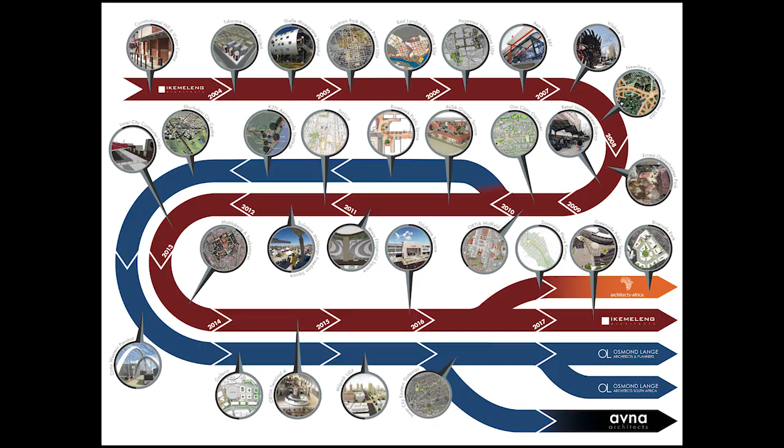This rather slightly narcissistic diagram that I've got on the wall right here charts the kind of professional journey that I've had in South Africa since 2004. That began with a very small company called Ikemeleng Architects back in 2004, and has ended up today with a group of 5 entities that employ 96 people across 5 offices, working across multiple sectors in multiple countries. So I've been very fortunate to have seen an interesting professional path during my time in South Africa.

What I want to suggest is that there's been no spatial meeting of the souls to follow on from the Truth and Reconciliation Commission. And that's a kind of theme of the projects that I want to show today. I've always been interested as much in the spaces between buildings as I've been in the buildings themselves.

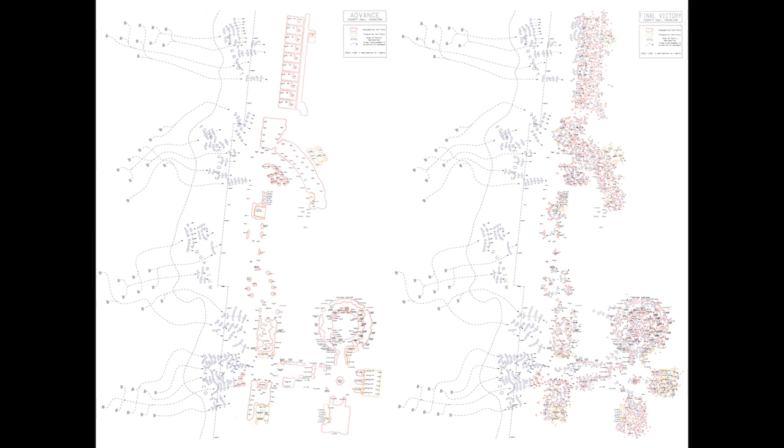This is a drawing that I did in my final year at the Bartlett almost 20 years ago that attempts to capture territorial patterns that admit or exclude, that encourage certain behaviors and discourage others, borrowing a graphic language from that of military maps, and beginning to map these spatial territories and speculate on interventions to break these down, to break them into smaller pockets, to granulate them, and to admit and include a greater number of people.

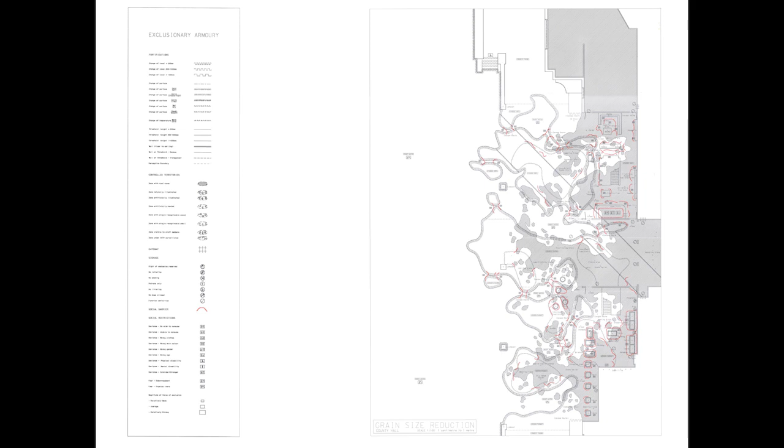So I looked at the idea of an exclusionary armory of sometimes quite subtle interventions and mechanisms, changes of level, changes of surface, roof cover, defensible spaces, social codes linked to consumption. So very subtle kind of changes that accept certain behaviors, accept certain people, and exclude others.

Now here at home in South Africa, our boundaries are far less subtle. The bubbles have become smaller compared to how they used to be in the days of the Group Areas Act, but they're still in place. We've also, it seems, become consumed by fear of violent crime. You hardly see a house without a high wall, particularly in the wealthier suburbs. And security features become a selling point for properties.

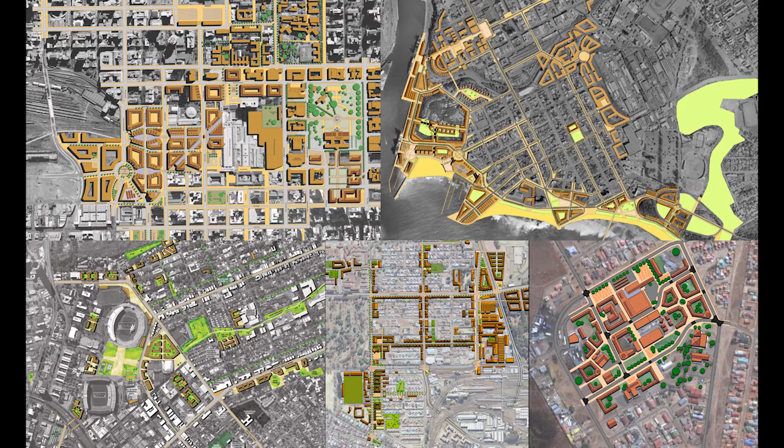Some of the early projects that we engaged in when Ikemeleng was formed in the mid-2000s were a number of urban design frameworks around the country, collaborating with a number of key urban design firms such as 2610 South and Urban Works and others. The focus was very strongly on public infrastructure and also on reimagining the role of the public environment as a kind of nation-building mechanism.

As part of this work with the urban design frameworks, we engaged with various stakeholder groupings, communities, property owners, business people, politicians, transport operators. This became an important initiation into South African society, its virtues and its ills.

Now, one of the first UDFs that we worked on with 2610 South was three UDFs in one, in fact, for Newclare, Coronationville and Brixton in the west of Johannesburg. This picture shows the house on Hamilton Street where my father and his siblings grew up. So there was a personal connection with the Newclare area.

Now this is also the area that at the moment has been the site of recent unrest and service delivery protests, sparked by a killing of a young mother caught in the crossfire of gangster warfare. What was quite interesting is that the issues that were coming up in the media, principally around inadequate housing, joblessness, nothing being done about the gangsterism, the corruption of the police, were exactly the same issues that were raised when we worked on this UDF 10 years ago.

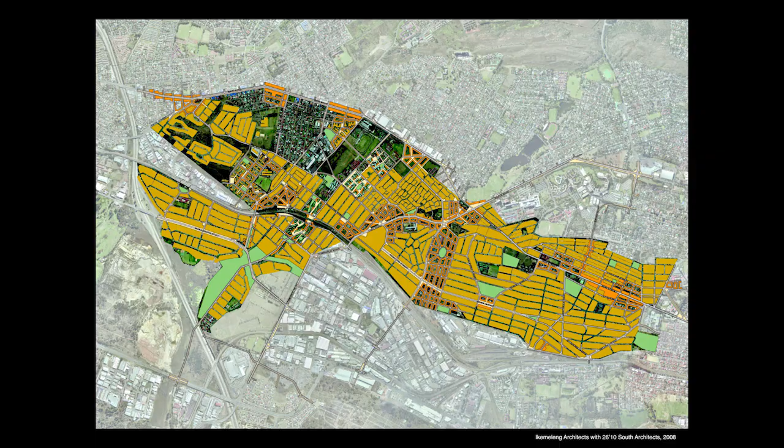So what was yielded was a UDF for a very large area of Western Johannesburg. New linkages between formerly segregated suburbs, because you've got a collection of different group areas from the apartheid era. New linkages across the railway line that is a big divider between the north and south, and a network of social infrastructure.

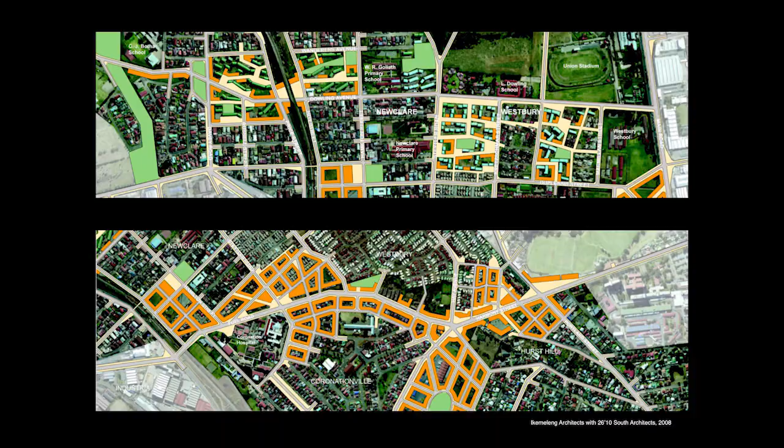But in particular, we looked at residential densification along key public transport corridors, and also the idea of a new spine along one of the key north-south streets in the area, through Westbury and Newclare, Dowling Avenue, that links the old council housing that is so neglected and where the drugs are sold, where it's a kind of epicenter of the gangsterism.

Lots of the elements were implemented, but I think also because it was a municipal project, the components that were allocated to provincial and national spheres of government were never followed through on, and I think that's what you're seeing with the unrest that has broken out lately. It's principally around provincial and national mandates like housing, healthcare, policing in particular, that are lacking, that were never followed through.

There's an interesting quote here from Steve Biko's book, I Write What I Like. "I no more work in order to live, I live in order to work. He has to wake up at 4 o'clock, 4:30 in order to walk a long distance to be in time for a bus to town. He works there for a while. So many calls are thrown his way by his boss. At the end of the day, he has to travel the same route, arrive home 8:30, 9 o'clock, too tired to do anything but sleep in order to be on time for work again the next day."

So that was Steve Biko recounting the daily routine of a black worker that he'd spoken to back in the 1970s. Now, what is really, I think, quite disturbing is that that's a reality for very many South African commuters, even today, some 45 years later.

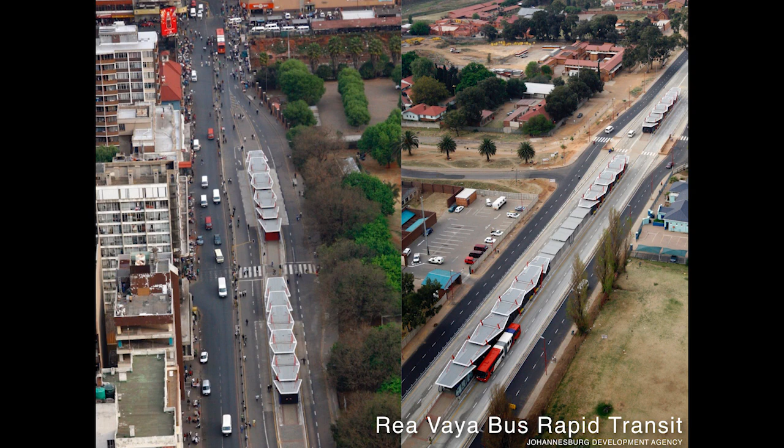So one of the projects that kind of came to define Ikemeleng Architects in its early years was our work on the Rea Vaya bus rapid transit. It's a blend of bus, tram and train, with median busways located away from curbside congestion and movement conflict, with raised platforms that facilitate rapid boarding and alighting.

So the BRT project is kind of an acknowledgement of the difficulty of absorbing the poorer South Africans within the inner core of the city. So it's a key socio-spatial transformation intervention whereby key nodes along transport corridors are densified on the back of a modal shift towards public transport and non-motorised transport.

In the words of the Deputy Minister of Public Works, public transport is not just about moving people, it is about democratising space, it is about deracialising the spatial geography that is still so deeply entrenched in the South African reality.

So the first stations, the prototype stations, were built next to Joubert Park in 2009. We worked on 5 different designs for the BRT stations, but it became very quickly apparent that, first of all, the city wanted one design throughout the whole network, and also that they wanted a very distinctive architectural language for the stations that would imprint a singular urban iconography across all of Johannesburg, common to Meadowlands and Morningside, to Diepkloof and Dunkeld. So it would kind of become Joburg's equivalent of London's Tube.

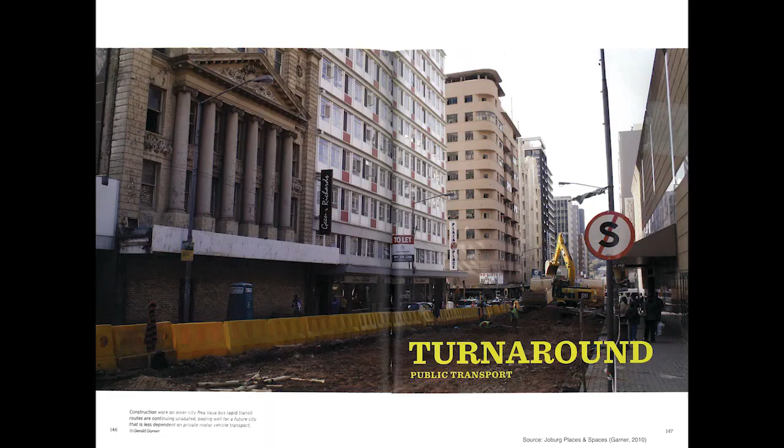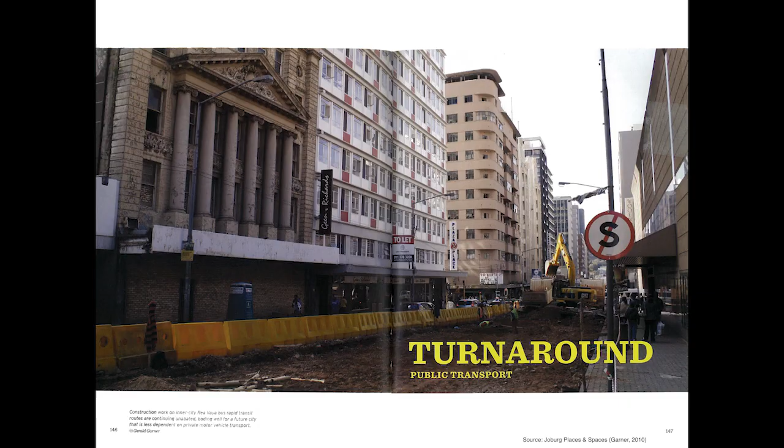But at a local level, it's actually quite destructive. It creates barriers to be able to cross the street. It's got very good intentions at a metropolitan scale, but at a local level, particularly in the inner city, it's got some quite adverse consequences. It needs a lot of elbow room.

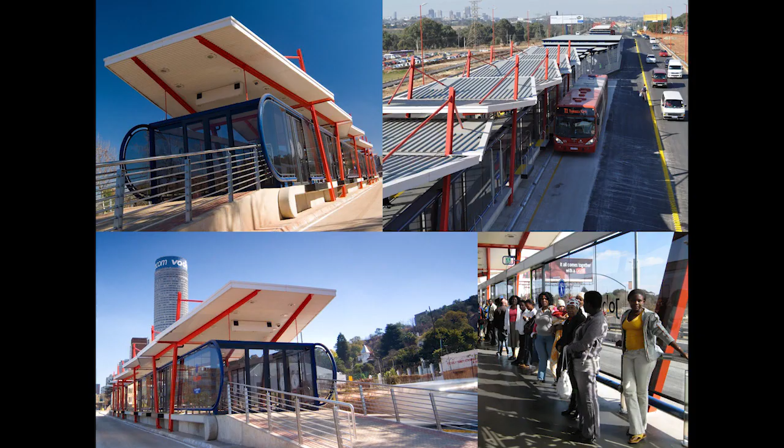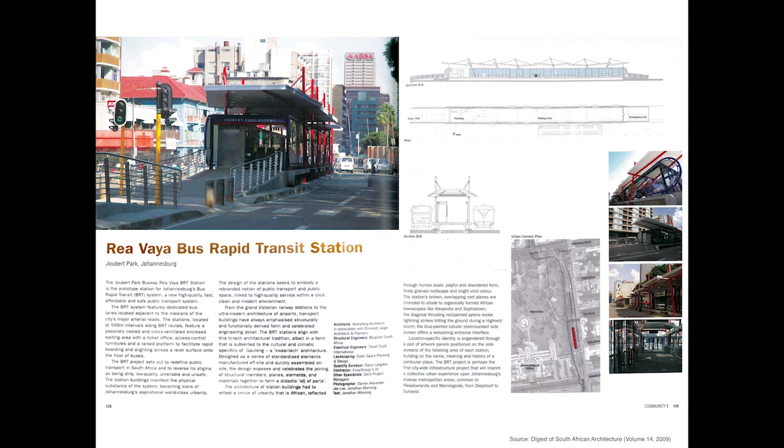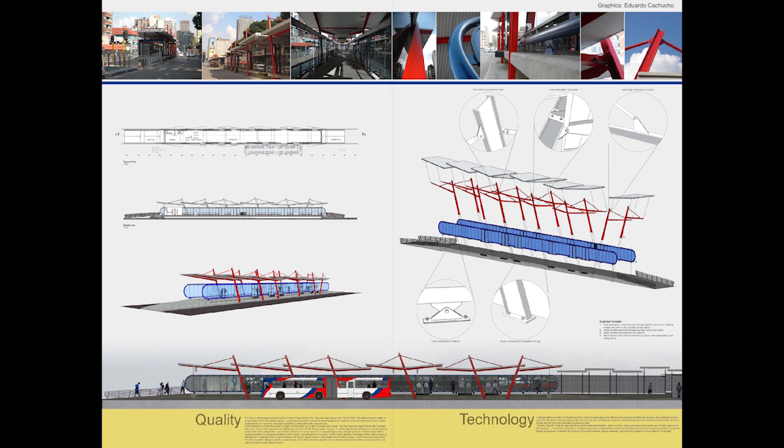Now there's a long tradition globally of transport buildings that celebrate technology, that express engineering details and the joining of structural members. So we designed the stations as a series of standardized elements that were manufactured off-site and quickly assembled on-site.

Each of the stations received a unique artwork treatment next to its ticketing module. It's a process that was run by the Trinity Session. Stephen Hobbs is in the audience today. He's still working on the current phase of the Rea Vaya. The aim was to try and engender a kind of location-specific identity that would be overlaid on the metropolitan identity.

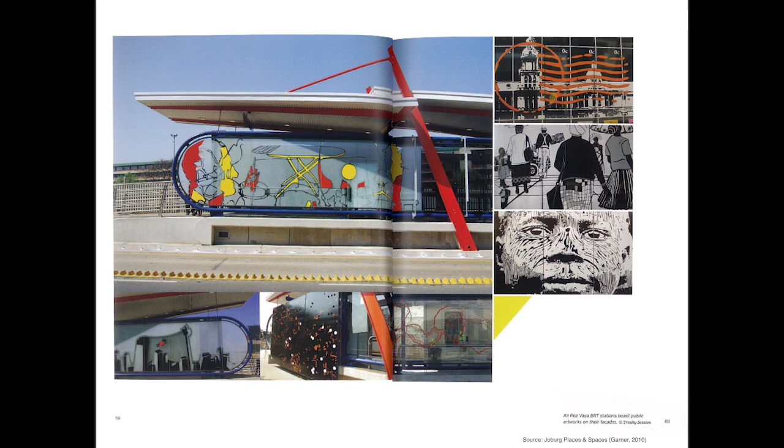And the artworks also represent a kind of shift in scale. So the stations are almost designed to be read at a vehicular scale from a distance, from the sidewalk opposite the stations. The artworks are far more immediate and work at a scale where they can be viewed through a bus window or from within the ticketing module.

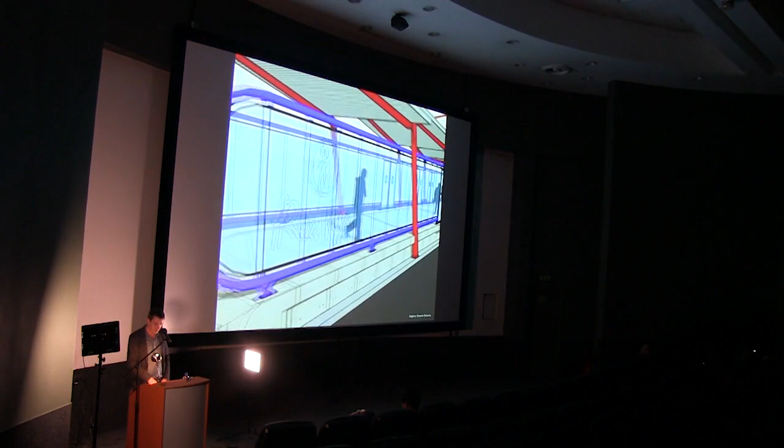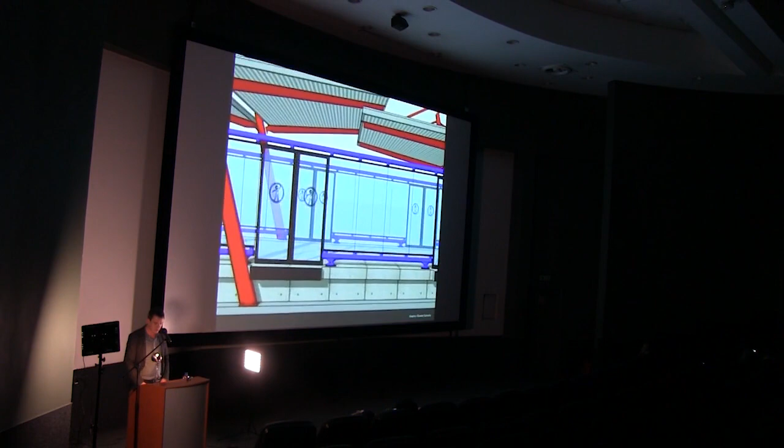So these are our ultimate clients for the BRT system. It's people that are used to queuing in dirty taxi ranks. So the Rea Vaya design was all about rebranding the notion of public transport towards an experience that's reliable, clean, safe, modern. We also attempted to design the screens in such a way that it would encourage cross-ventilation and passive cooling of the station, so it doesn't have any mechanical cooling.

Okay, so following on from our work on the physical infrastructure, we also got involved in some land use planning and urban design guidelines that we worked on with Mohammed Mayat Architects and Urban Designers back in 2009. So these were aimed at trying to set a template for densification of the BRT corridors and the station nodes, and also included ideas around public space reconfigurations to accommodate increased pedestrian footfall within these station nodes.

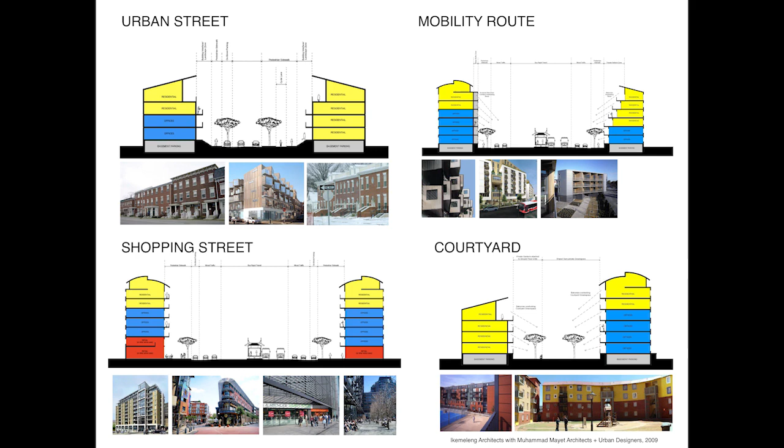We also looked at a series of typical street sections that would envisage wider street widths to allow for widened sidewalks to cater for increased pedestrian footfall, and kind of desirable building typologies to line these streets within the station nodes, and ideal scenarios around street edge interfaces.

So this work led us to be approached by the city around about 2012 to conduct a visioning exercise for 4 key nodes within the city of Johannesburg that were eventually integrated into the city's planning policies. Those 4 nodes were Sandton, Stretford, Orlando, and the inner city. So the first one, Sandton,

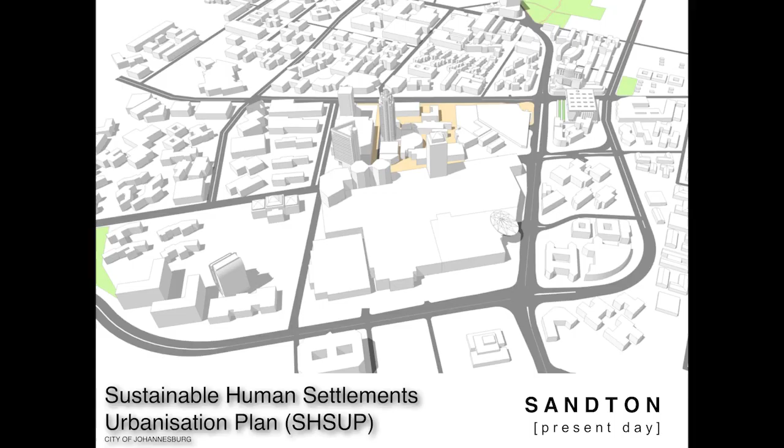the focus was on Sandton's function as a financial services hub, and also on how it might become more inclusive. Because if you know Sandton, there's this hard grid of streets, blank wall interfaces along lots of the major routes, a very difficult environment for pedestrians to traverse. So we looked at how it might transform on a kind of 10-year interval. So we're actually approaching 2020 now. Proliferation of upmarket residential developments that is

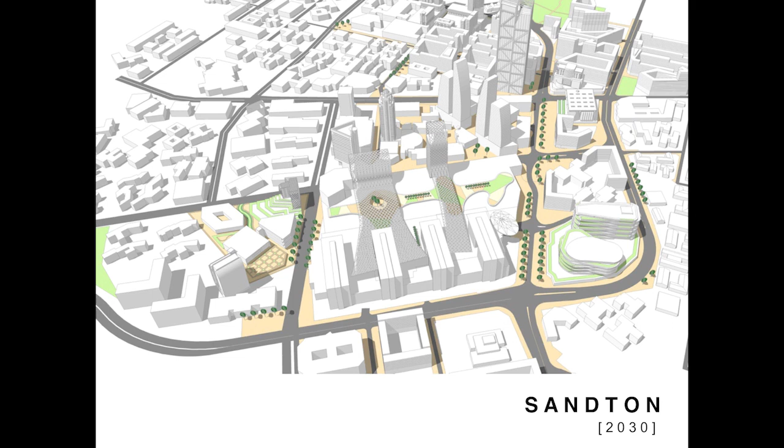happening right now. So we looked at the idea of repurposing Rivonia Road, narrowing Rivonia Road to make it more of a kind of pedestrian priority high street, and that the traffic would be pushed to the outer ring to make the core more pedestrian friendly. By 2030, a shift in travel patterns towards public transport and ride sharing was assumed, and some of those parking plinths of the big office buildings could potentially begin to be converted into cafes and shops and bars that open up onto the street.

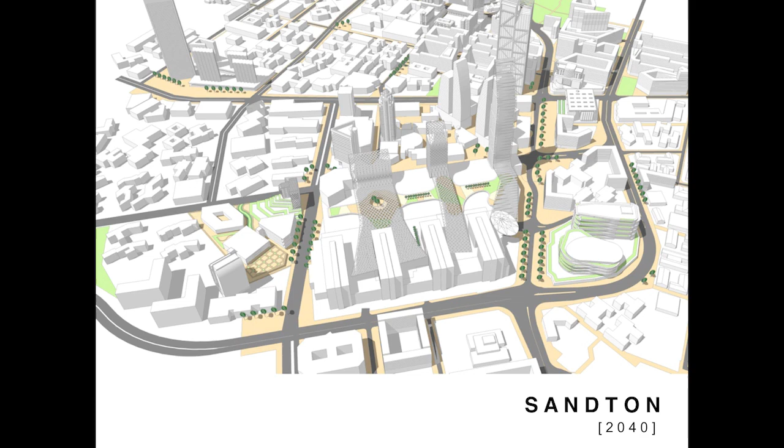By 2040, there'll be further densification, and you'd start to see the impact of inclusionary housing policies. So some of the housing developments would include gap housing, affordable housing, so that it becomes more of a mixed income residential area. An expansion of the walkable core into the neighbouring suburbs.

Now, some of this work led to a real project that Osmond Lange has just completed, the Sandton Loop, which is a NMT and pedestrian priority set of infrastructure along the soon-to-be-open BRT route loop around Sandton CBD.

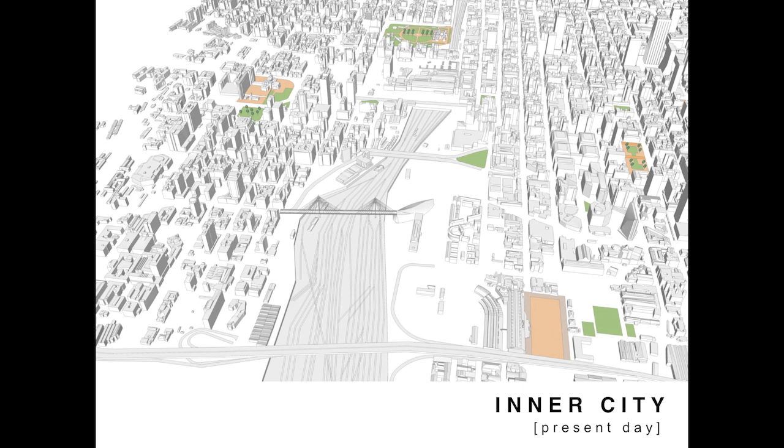With the inner city, the focus was on leveraging its status as a continental marketplace. So by 2020, the International Transit and Shopping Centre, the long-distance bus and taxi facility that you can see going up at Kazerne right now, would be in place, as well as several upgrades to key public spaces.

Then we looked further ahead. The idea of pedestrianising Noord and Sophie de Bruyn Street and Wolmarans Street, and that some of the railway sidings would be relocated to enable us to put a park beneath the Nelson Mandela Bridge that would become the focus of where the city can host concerts and outdoor events. So it would become a little bit like Johannesburg's equivalent of New York's Central Park.

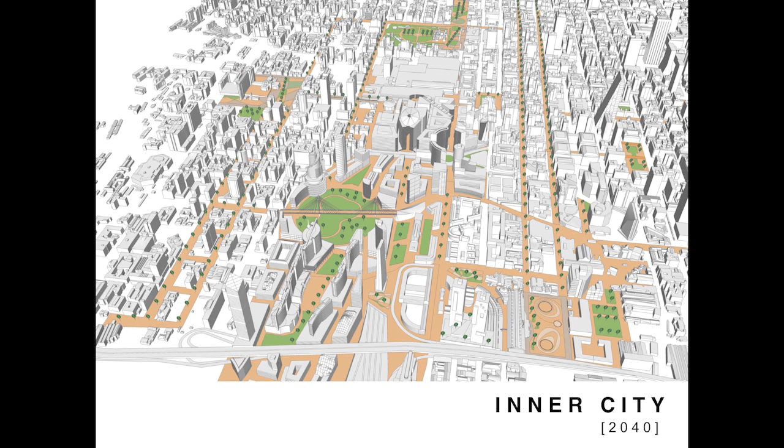By 2040, the idea of having 300,000 new residential units within the inner city, so a shift away from office buildings towards inner city residential, and distinctive quarters, each with their own character: Little Lagos, Chinatown, Somali Town, Little Kinshasa, and the Ethiopian Quarter, would be celebrated and expressed so that they become places not just for locals but for international tourists to come visit.

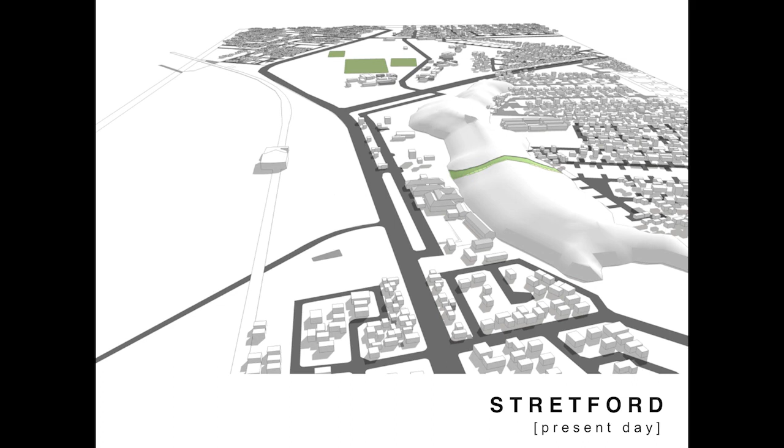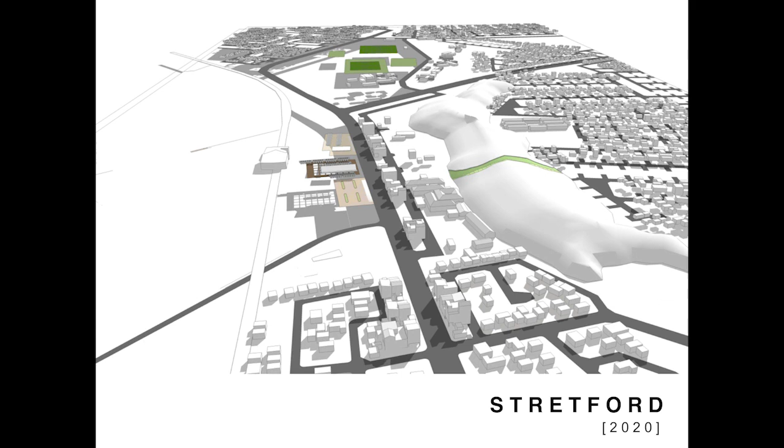Now, Stretford, on the southern edge of the city in Orange Farm, is 30-40 kilometres away from the CBD. The focus here was on creating an enabling framework for social mobility and providing support infrastructure for the non-economically active. So by 2020, we see the provision of new social infrastructure, libraries, clinics, sports facilities. By 2030, the expansion of the transit-oriented development around the PRASA station and the introduction of free Wi-Fi in public spaces. By 2040, it becomes a node for small businesses and for residential expansion and densification.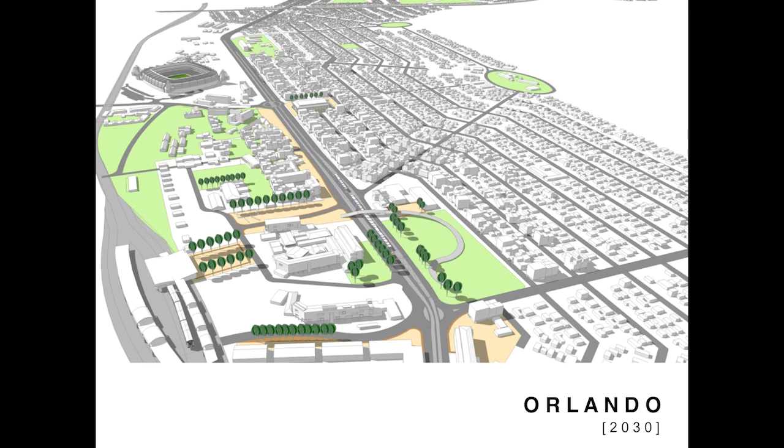So by 2030, a new Mashinini Park on the old sports field and a footbridge link across to a public square linking to the station. And the beginnings of incremental owner-led self-build densification. So a very different pattern from Sandton and the inner city, where it would mostly be developer-led. In the township, because you've got this fine-grained townscape, we looked at ideas of how densification would happen on an incremental basis, a stand-by-stand basis.

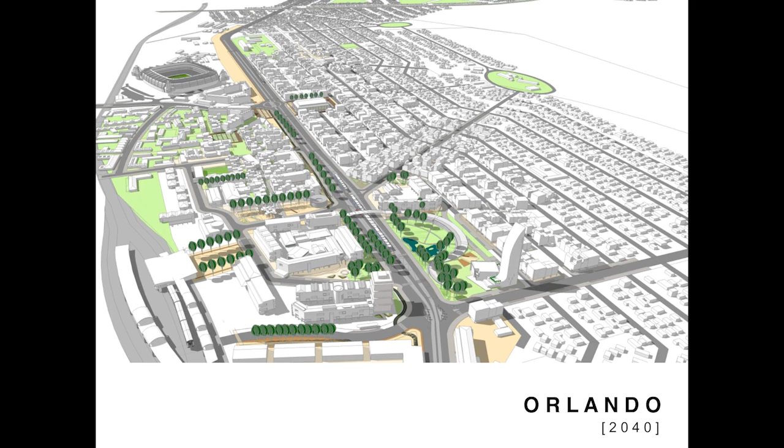Then lastly, 2040, further densification. It becomes a location for businesses seeking more affordable rents compared to the inner city and the northern suburbs, and a township vibe energized by density.

So following that project, we were approached by an international organization called the Institute for Transportation and Development Policy. It's a New York-based advocacy organization. We were one of 10 architects selected to represent their city and to look at the impact of transit-oriented development intervention on a 1 square kilometre section of our city.

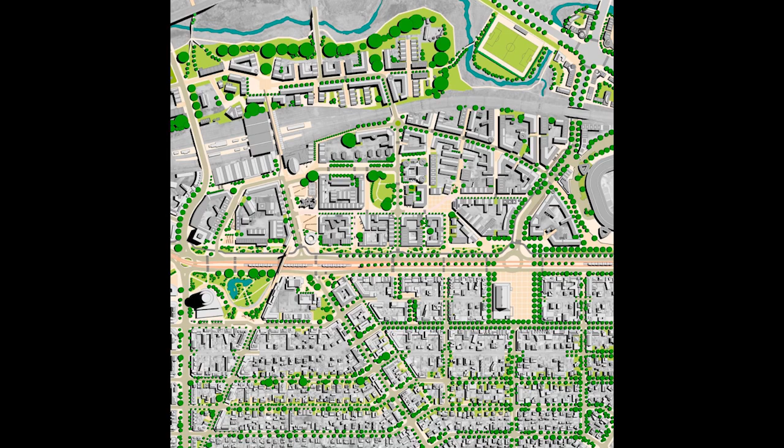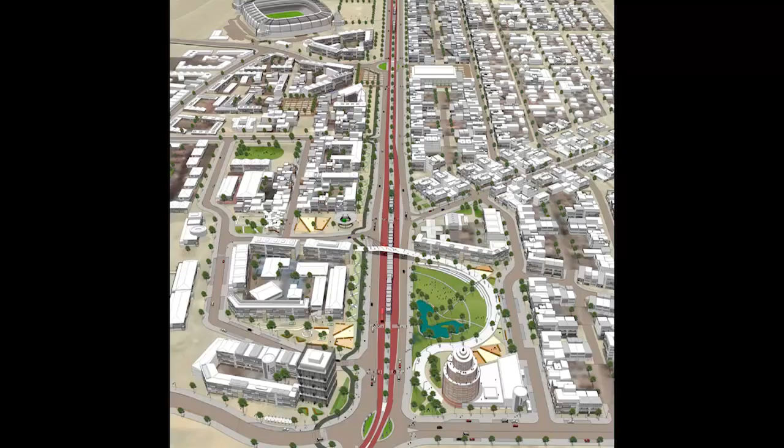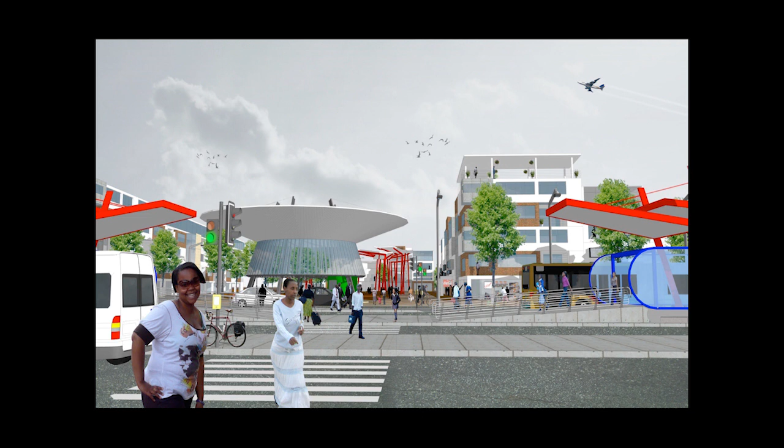So this was really a kind of further rendering, further development of the exercise we did for the City of Johannesburg's planning department. So this image is an image of a public space around the Rea Vaya station, including a ticketing hub, the idea of integrated ticketing between Rea Vaya, Gautrain and Prasa. The activation of Mooki Street so that it becomes a kind of South African version of the Champs-Élysées, lined by buildings with ground floor retail, but our own South African version with spaces and facilities for traders.

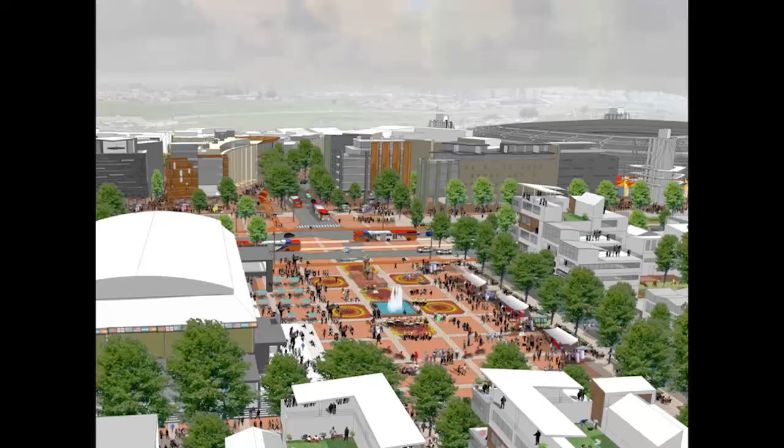And a major public square where the current car park is for the big community hall. Turn that into a major public space that anchors the precinct, a community space for gatherings and events and after-match festivities for Pirates fans when Pirates play at the nearby Orlando Stadium.

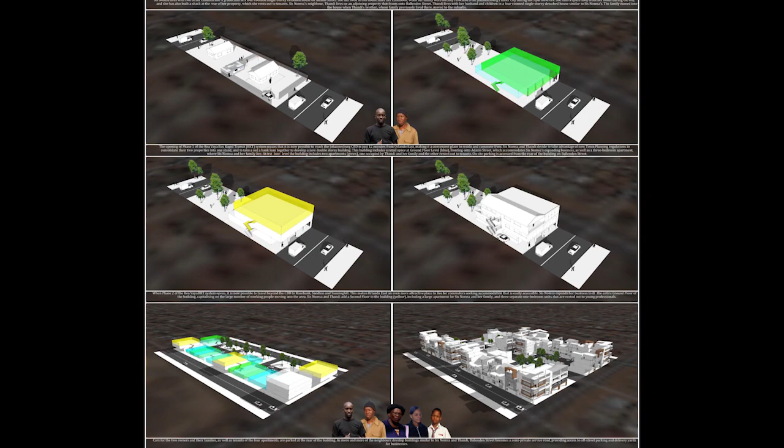Then we also looked at this narrative that was created around incremental self-built densification, geared towards income generation from creating space that could be rented out and create an income for the property owner, and job creation so that it would encourage mixed use, ground floor businesses and residential apartments above, transforming from this kind of standalone township house towards a multi-level mixed-use building typology.

Now, flowing from our work on the BRT, we also worked on a number of public space projects along the Phase 1 BRT route, which I'm going to show you, not all of these, but a couple of the key spaces. Now, the first of which was work within Johannesburg's shopping district, the retail improvement district. Despite inner city decay, it still functions as the city's major retail hub. It's kind of Soweto's CBD, but it's home to some of the biggest stores of chains like Edgars and Truworths, and even Woolworths has got one of the largest stores in the country.

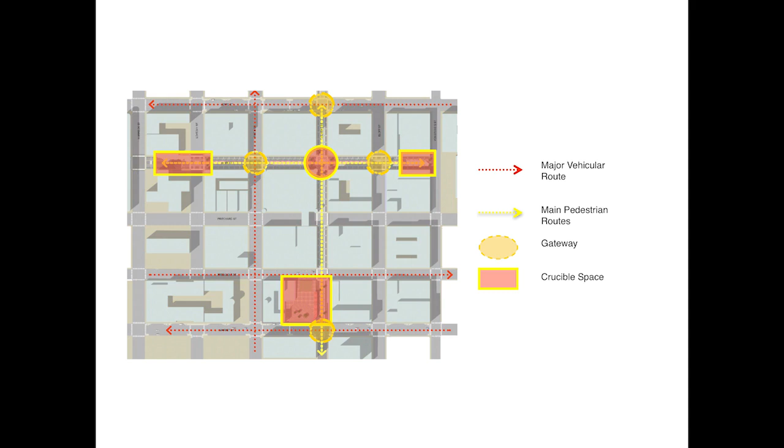So our plan for the retail improvement district revolved around creating pedestrian priority routes along Kerk Street, linking Bank City to the High Court, and along Joubert Street, which links Park Station Concourse in the north, all the way down to Gandhi Square in the south, and that these would be the primary pedestrian distributors within the RID and the primary shopping streets. Then also this idea of crucible spaces, nodes within the precinct and along those routes that would act almost like the event spaces that you get in shopping malls, but on an urban scale.

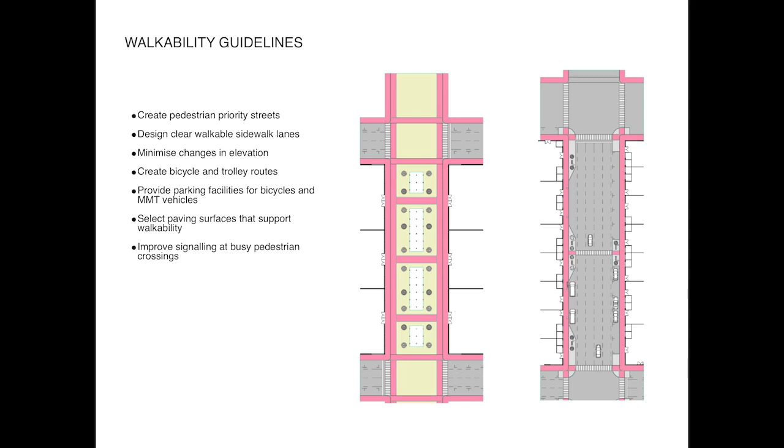We looked at some walkability guidelines. We designed streets for walking rather than just for driving and parking. Looked at how you might remove obstacles, widen the sidewalks, create a little bit more generosity, especially on the street corners, minimize elevational changes.

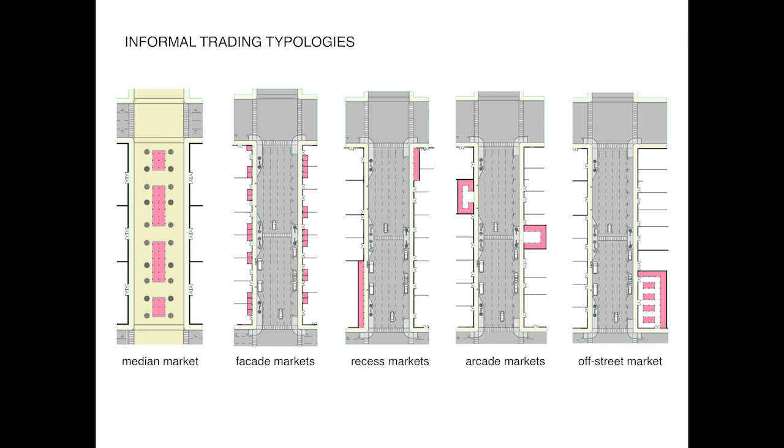And then we also looked at how you might incorporate informal trading within the retail improvement district. It was happening informally. A lot of the shopkeepers, the shop owners were complaining about their doors being blocked by informal traders. So we looked at a way that the two could coexist and that they might actually cross-fertilize each other and complement each other even, because a unique offering of Johannesburg is that you can go and shop in a major retail chain but also buy from an informal trader.

It's one of the few places you can do that. So Kerk Street Market was one of the first markets that we developed based on those typologies that I showed in the previous slide. A median market, so it's kind of like the BRT of informal trading. It sits up the middle of the street, pulls the traders away from the face of the buildings and obstructing their entrances, so that you essentially got two parallel streets.

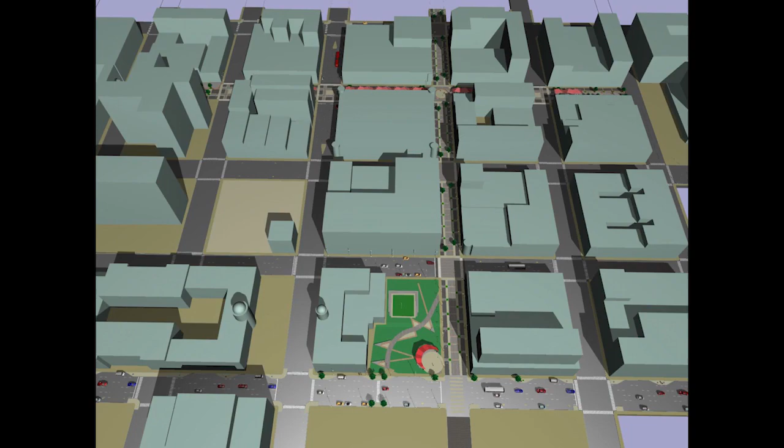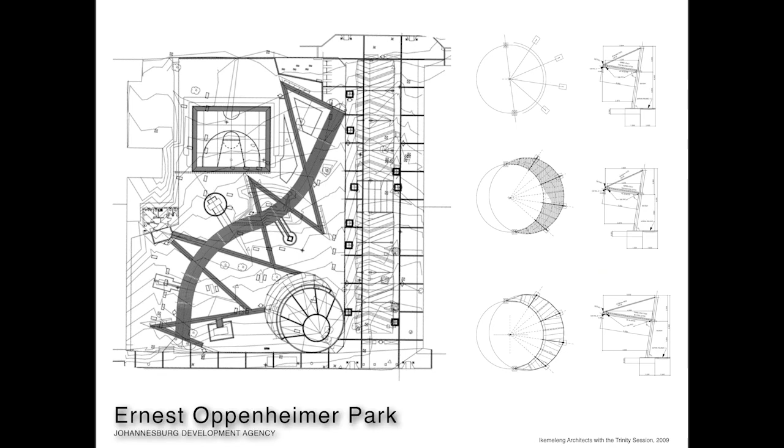It used to be home to the Leaping Impala sculpture that was eventually relocated to the Anglo precinct because it kept getting vandalized. So we looked at the idea of a sculpture garden that would sit at the southern entrance to the shopping district. You've got a diagonal pathway that divides the park into two distinct pockets, an active pocket and a passive pocket. A multi-purpose court in the northern pocket, geared for active games and sports, and a mini amphitheatre for events and performances in the southern pocket.

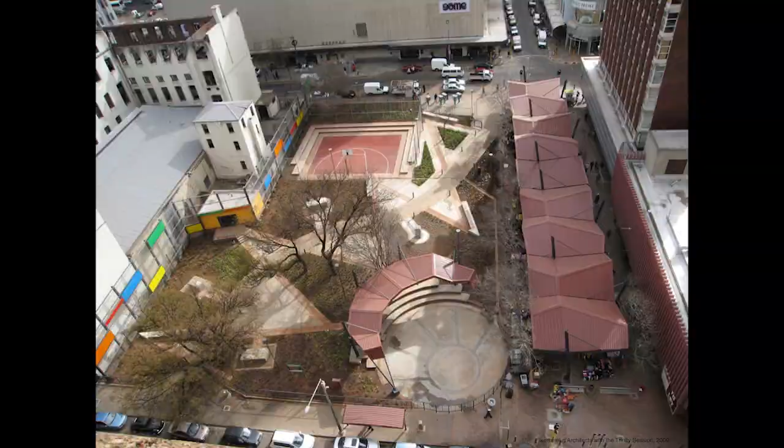So there's a second pathway that zigzags across the main pathway that links a series of sculptures and seats. The Public Artworks project, again overseen by the Trinity Session. A new Impala sculpture was put in place, giant replica of the Oppenheimer diamond, and seats adorned with text celebrating Joburg's place in popular culture. Basketball court was installed geared to the new younger resident profile of the inner city, a shift away from the older resident profile of the past. And then this amphitheatre with this kind of praying mantis roof canopy that got nicknamed in the office Crouching I-beam Hidden Channel.

Then on to Mary Fitzgerald Square. It's actually been upgraded twice. We were responsible for the second one. It was necessitated because the first time they did it, the electrical infrastructure wasn't sufficiently protected. So every time Standard Bank Joy of Jazz or a major event came to the square, the electrical infrastructure was getting damaged. So they had to lift all the paving and replace it, so it was seen as an opportunity to do something different. So we were the designers for the second time around.

So Mary Fitzgerald is one of the most important civic spaces in the city. It's one of the few places in Joburg where large numbers of people can gather to watch performances or outside broadcasts or to protest or march. It's the primary gathering place for most of the marches that happen in the inner city. It anchors the Newtown Cultural Precinct, but it also struggles with this dichotomy of its dual role as a place of gathering on the one hand and a place of day-to-day use on the other hand, animated when full, but bland and overscaled when empty.

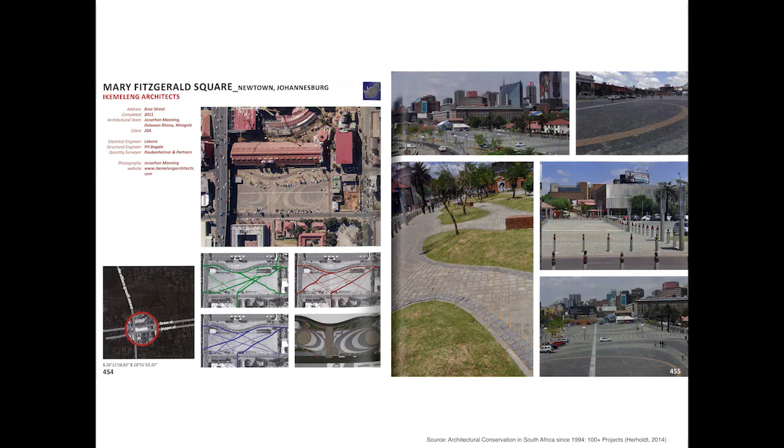So we attempted to overcome some of these shortcomings. We mapped movement patterns during its dormant period to look at how people were passing through the square or using the square, and we attempted to respond to these. So we came up with this idea of a large public space bisected by a central axis, so we kept that from the previous design, that is aligned with the front entrance to Museum Africa. And we introduced a paving pattern that mimics movement and crowd gathering patterns.

Now, usually we're kind of against this idea that you do funny things with the patterns in the paving because you don't read them except on the architect's drawing. Mary Fitzgerald Square, because of where it's sited next to the double-decker highway, it's one of the few public spaces where you can play with paving and it can actually be seen without using a drone.

So we introduced this idea of congested cores that gradually fragment into smaller, looser pockets around the edge of the square. Then around the edge, we introduced small amoeba-like pockets of softer landscaping that introduce a kind of gentle shoulder that envelop the square, shielding it from the fast-moving vehicle traffic and offering places to sit or lie on the grass, particularly when the square is not in use by a large gathering.

And what was interesting is the edge of the square started to become occupied. You started to see people coming out and having lunch or sitting and talking on the benches and so on, which was quite encouraging.

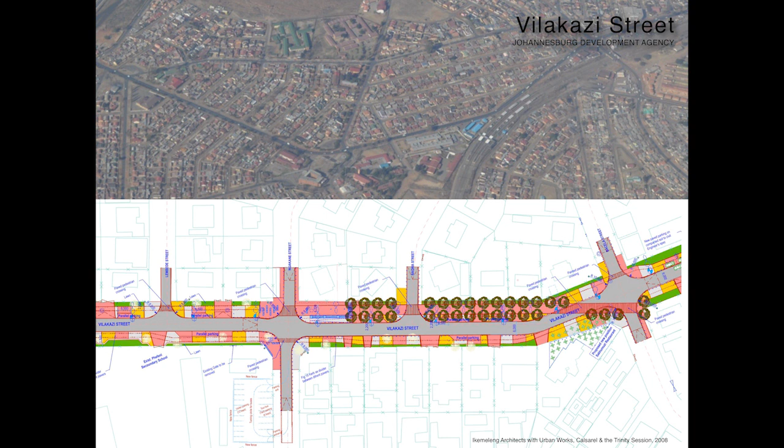So one of the important steps we took at the beginning of the project was to conduct a kind of literature review and interviews with some of the people that were around at the time to establish exactly what happened in the space and where they happened. So this is a kind of mapping of the confrontation between police and students who were marching from Morris Isaacson School down towards Orlando Police Station, down Vilakazi Street at the corner of Moyama and Vilakazi. And this is where we're told it all kicked off.

A dog was released into the crowd by the police. The dog was stoned to death, and that prompted the police to start shooting indiscriminately at kids, and they carried on shooting as the kids were running away. So the red is showing the patterns of where the school children were, and the blue, there's a housing development now, but it used to be an open site. That was where the police were gathered with their Casspirs.

Then further up Moyama Street, at the corner of Moyama and Vilakazi, a similar confrontation took place, with some of the students trying to get down an alternative route to get to Orlando police station. Again, they were stopped, and shooting started here as well.

And this is the sequence, the famous sequence that many of you will recognize with Sam Nzima's photograph when Hector Pieterson was shot. So we were able actually to identify the spot where Hector fell, and Mbuyisa Makhubo picked him up and ran along the street, along Sisulu Street, and where the famous photographs were taken, on the way to Phomolong Clinic, where he was examined and pronounced dead.

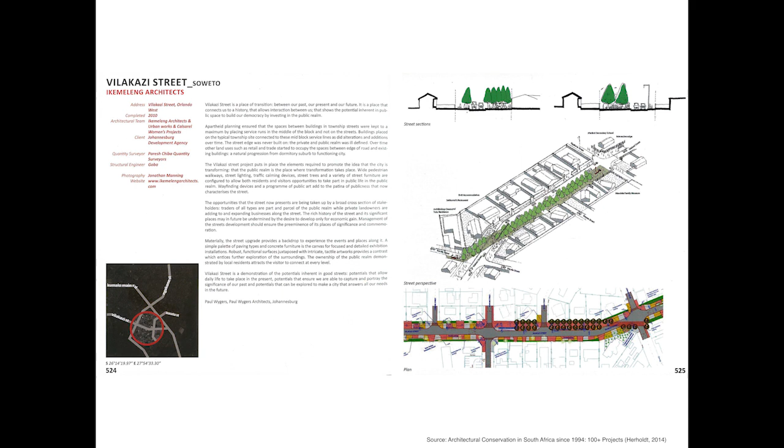Now, the first student that was actually killed prior to all these other confrontations was a young man called Hastings Ndlovu, further down Khumalo Street, at the border between Orlando West and Orlando East. So we were also able to piece together how this happened and where exactly Hastings was shot. It was on the bridge itself. So all of these clues, this research became a rationale for how we started to intervene within the precinct and to mark these spots and spaces where these events happened.

We approached, and I say we, it was a joint venture between Ikemeleng Architects, Urban Works, and Calsarel Women's Projects, a landscape architecture firm. We approached the upgrade of the Vilakazi Street precinct with a mix of trepidation and inspiration, having met people like Antoinette Sithole, who's Hector Pieterson's sister, and gained an understanding of exactly what happened in the 70s.

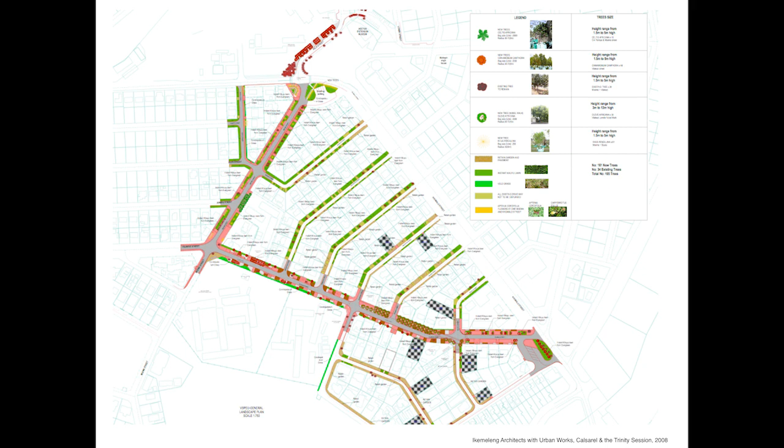We also looked at this idea, a lot of you will be familiar with, that when homeowners in many of the townships upgrade their driveways, they often extend that paving onto the sidewalk in front of the house. And so you get this patchwork of different paving materials, different paving treatments along the sidewalk that almost mimics the townscape grain of the buildings themselves. So we tried to do the same thing with our paving intervention. And there you see this kind of patchwork of different paving materials that are extended from the cadastral grid.

So some simple pragmatics: sidewalks to walk on, places to sit, places to trade, and a kind of an enabling framework for the street to come alive, which it has done ever since this upgrade went in. It's one of the biggest impacts we've seen of any of our public environment upgrade projects. And during the 2010 World Cup in particular, and on Youth Day every year, the street is abuzz with activity.

You really see lots and lots of people come, and we've seen a big transformation with lots of the houses along Vilakazi Street converting to businesses, one of which we're actually working on for a private client at the moment. There was also a very rich public artworks program, born of a series of community workshops, again coordinated by the Trinity Session, that added an extra layer of narrative to the already rich streetscape.

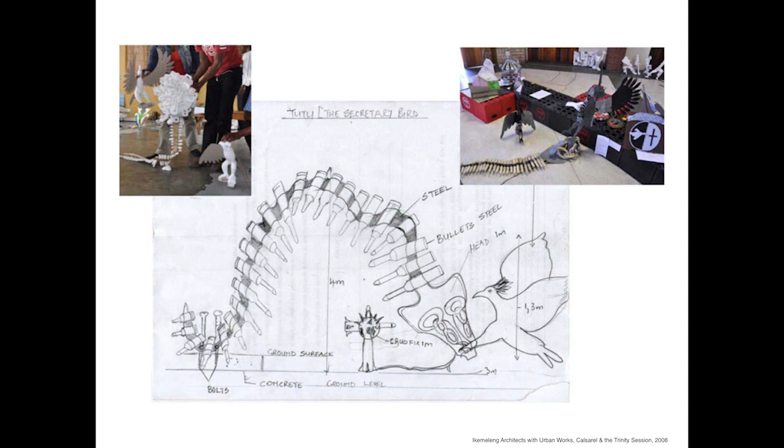Now, this is actually an artwork that wasn't implemented, which I'm very disappointed about, because it was my favorite one that emerged from the workshop process. This was going to be placed on the wall of the Tutu residence, and it was a sculpture that featured a secretary bird perched on a snake, the body of which was made of a machine gun magazine, and it was symbolic of this bird overcoming the evil of the apartheid snake, which unfortunately was never taken forward. But many of the others were.

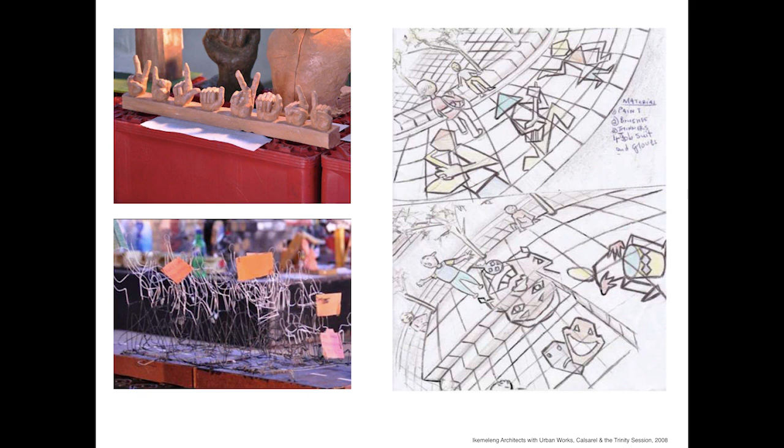The Vilakazi hands became a gateway sculpture at the southern end of Vilakazi Street. The wire models of the students protesting marked the point of the confrontation between the students and the police at corner Moyama and Vilakazi. And there you can see some of the translations.

And these artworks have become points of commemoration that happen every year on June the 16th, when people gather. You know, there's a kind of tradition, many people dress up in their old school uniforms on Youth Day and commemorate the sacrifices that were made by that generation of students. And a lot of them travel to Vilakazi Street to commemorate the role that these individuals played in the freedom struggle. And a lot of them use the artworks as points of commemoration.

Now, this artwork was a very interesting interpretation that sits outside Sakhumzi's restaurant at the lower end of the Nobel Laureate Walk. There's a Tswana proverb that says, "Two bulls can't stay in the same kraal." And so this was alluding to the fact that you've got these two Nobel laureates. But in actual fact, their points of departure in the freedom struggle were very different. Nelson Mandela, prior to his imprisonment, was one of the instigators of the armed struggle, versus Bishop Tutu's role as the kind of peacemaker.

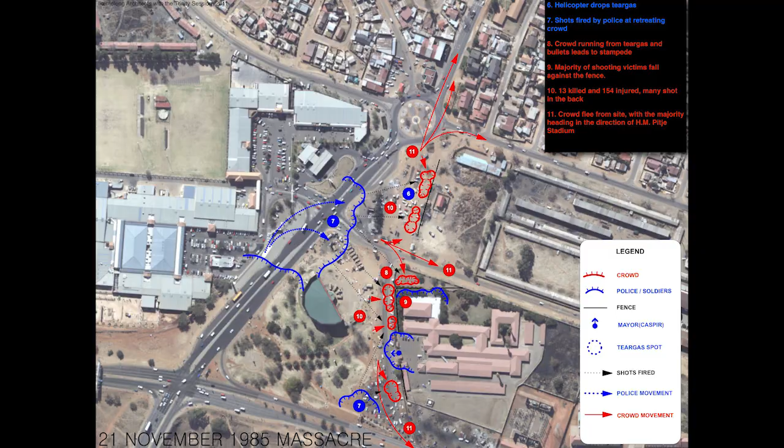So lots of people were shot in the back, and you'll see the line on the northern side. This line, I don't know if you can see that there. The straight black line was a fence line that used to exist, and lots of people were trapped. Lots of the dead were trapped against that fence with nowhere to escape to, and that's where lots of the people were killed. So the layout of the park was informed by these mappings that we created that looked at where exactly the key historical events had happened.

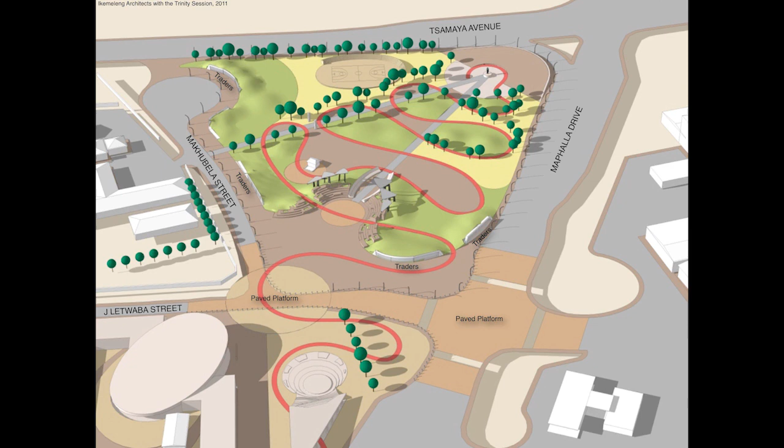There were two key axes that we kept intact that were already in the park. One linking the entrance to the municipal offices to the existing Solomon Mahlangu statue in the southwestern corner, and then a new axis linking the statue to the street corner of Letwaba and Makhubela Street, which is where the massacre happened. So one of the first small interventions we made: the statue used to look outwards towards the road intersection. So we decided this is not a good idea.

Let's reorientate the statue so he faces the park, faces the public space, faces the pedestrians. We also introduced this ribbon walkway that meanders through the park, linking various points of significance and artwork sites. And then we created this gathering space that straddles the street intersection so that when there's a big gathering, the streets are closed and it occupies the road, a little bit like when there's a funeral or a wedding in the township and they close the street to occupy the street. So the same kind of notion.

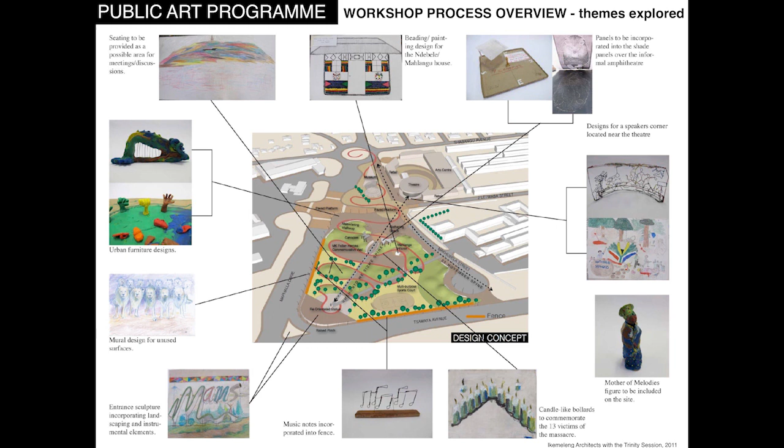Again, we worked with the Trinity Session on a community artwork project. This is some of the artworks that were produced by, there's actually a local artworks collective that works on the site, and it culminated in an exhibition. Again, one of my favorite artworks wasn't produced.

This is the tree that is commemorating the words that Solomon Mahlangu was said to have uttered on his way to the gallows, that my blood will nourish the tree that will bear the fruits of freedom. So this was going to be the tree that was nourished, that was going to be sitting in the middle of the traffic circle on the northern side of the site, but hasn't yet been implemented.

There's a pair of memorial walls at the entrance to the gathering space. They've got this mosaic treatment that's almost like a serpent-like texture, and candle-like commemorative bollards to the 13 people killed.

So this is the reorientated statue being unveiled by the then Tshwane mayor and by Chief Mahlangu, who is Solomon Mahlangu's older brother. This was a gateway artwork facing outwards to the road, the mother of melodies. That's the translation of Mamelodi. And a series of views of the gathering space on the day it was opened. That's a view down that main axis from the gathering space looking back towards the statue.

So a shift outside the borders of South Africa now to the city of Kumasi in Ghana. Ghana's second city, home to 3 million people, capital of the Ashanti region. Now I'm sure many of you will know that the Ashanti region is the home of kente cloth. In fact, there's a village just outside Kumasi called Bonwire, where there's a concentration of kente cloth weavers. It's a very, very rich cultural heritage within that region.

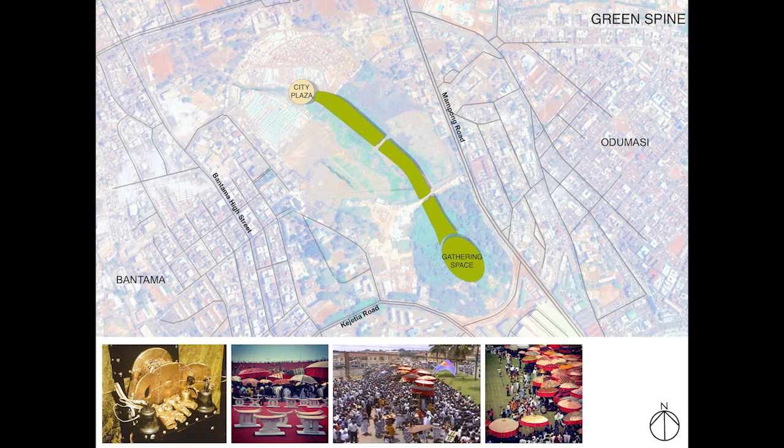So we started off with this idea of this kind of new CBD for Kumasi, but we wanted to do it in such a way that it wasn't just a kind of generic mixed-use commercial precinct. We wanted it to embody something of the rich tradition, the rich culture that we observed in Kumasi. And working with a local Ghanaian architect who is also originally from Kumasi.

This idea that we create this green spine along the path of a stream that runs through the middle of the racecourse site that links a city plaza on the northern end to a gathering space on the southern end, where the gathering space would replace the stadium. So it would be kind of a natural amphitheatre, but a more appropriate space for this Adae Kese festival.

So we introduce this grid of streets that bisects the green spine, with artworks positioned at the points of intersection that commemorate and narrate the lives of the 16 previous kings, and we leave space for the future kings as well.

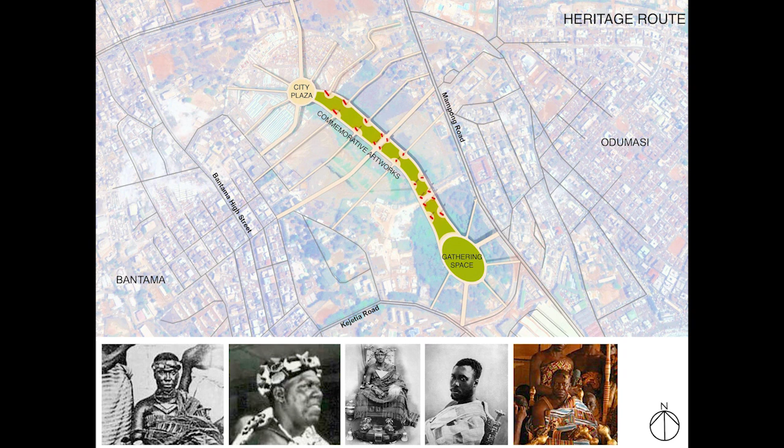And each of those streets would take the name of the previous kings. So the collective effect is that if you walk down this spine, it's almost a bit like an Ashanti National Mall, like the version of the National Mall in Washington, where if you walk down, you can actually understand the chronological history of the Ashanti monarchy and the role that it plays in Ashanti society.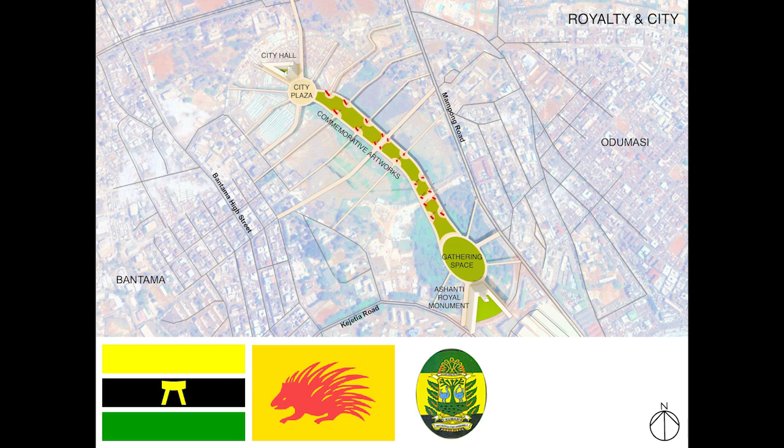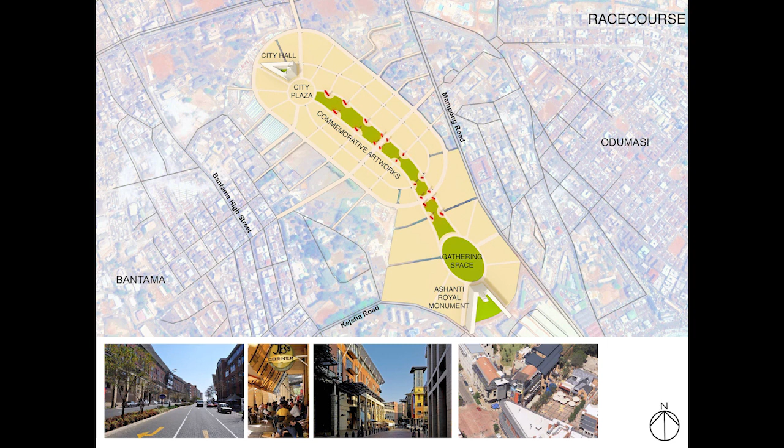So it would link then to the idea that you have this Ashanti Royal Monument, a royal monument on one end, and the City Hall for the Kumasi Metropolitan Assembly at the other end. So this kind of linkage between the royalty and city government. Then we looked at the idea that the former racecourse path could become the main vehicular distributor, so that the core is then kind of preserved for pedestrian priority.

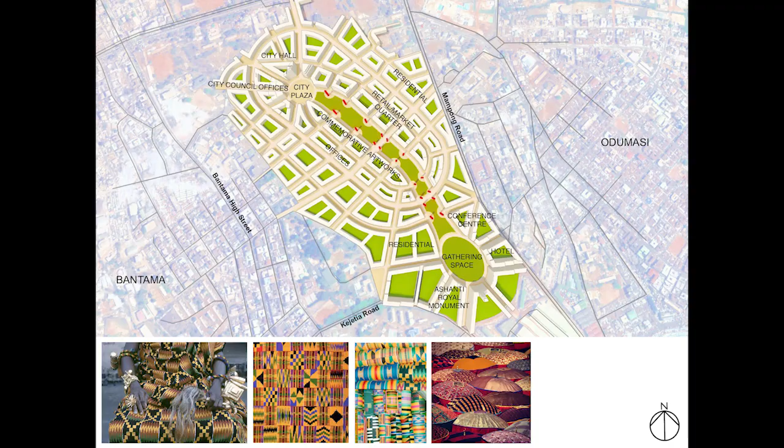And then ultimately that it would become this kind of new urbanist precinct, a mix of retail, office, residential, hotel and education. But the buildings that front onto this green spine would have a special treatment that would express Ashanti identity through colour, through texture, through geometry, facing onto the green spine. So this is what's happening at the moment. We're looking at the first phase that comprises a retail and office development and a hotel and residential apartments also in the pipeline.

Shift to the other side of the African continent, another African metropolis, this time Nairobi, Kenya, which I find a very interesting city because it shares a lot of Johannesburg's virtues, but also its ills. It's also moving in this kind of car-dominated direction that excludes the poor and marginalizes them in favor of motorists and car owners.

So this is a site that sits in Westlands, which is, I guess, Nairobi's equivalent of Rosebank. It's just to the north of the CBD, but you've seen a lot of the big corporates move out of the CBD for similar reasons that they've moved out of Johannesburg inner city and set up these kind of office park type environments that can be controlled.

Now, if we think we have a paranoia about security, the Kenyans even more so. And that's largely as a result of the events that happened the second time I was in Nairobi back in 2013, the Westgate massacre, in which 71 people were killed and 200 wounded when Al-Shabaab attacked the Westgate shopping mall just up the road in Westlands.

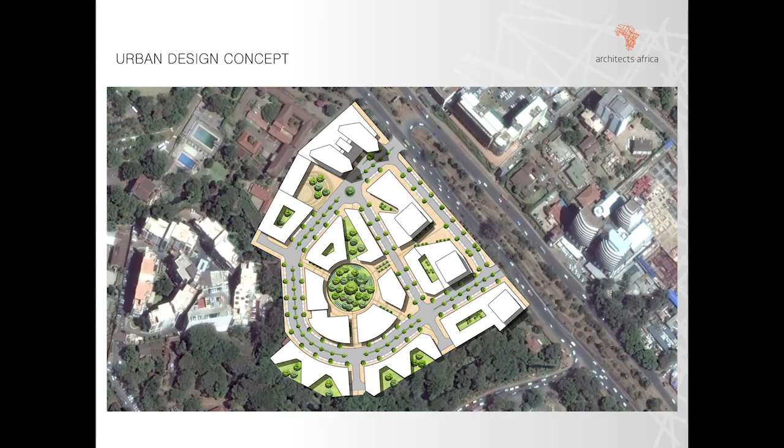So almost every public or commercial building has a checkpoint outside it. Cars are searched at the gatehouses with mirrors underneath to check they're not carrying explosives. Metal detectors at the entrances to all public buildings and shopping malls and so on you've got to go through. So even more than we've got. So we were tasked with working on this, again, an integrated mixed-use precinct, to incrementally replace an existing development and to increase its bulk. Again, a mix of retail, office, residential and hotel.

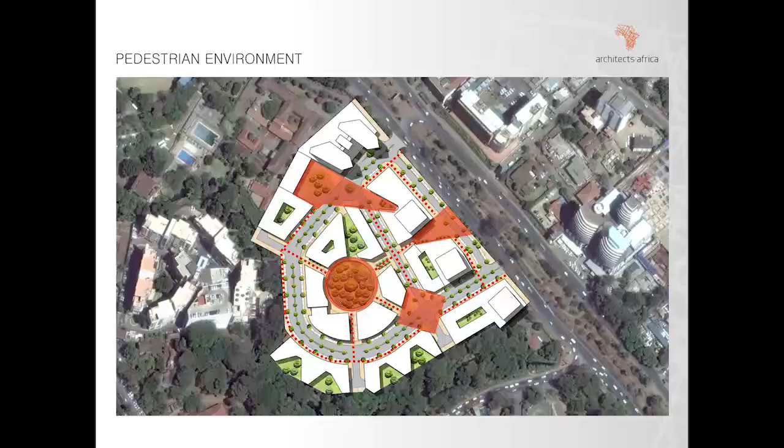But what we suggested to the developer is that we shift the security perimeter to the building thresholds, so that rather than having this big heavy gate at the entrance to the precinct, the building thresholds then become the point of security and the division between public and private, and that you almost have a security regime that's similar to the London Square Mile, where it's based on surveillance and rapid response and the detailed checking only of large vehicles like trucks and buses that are big enough to carry explosives that will do major damage, and then the minor security check happens at the doors to buildings.

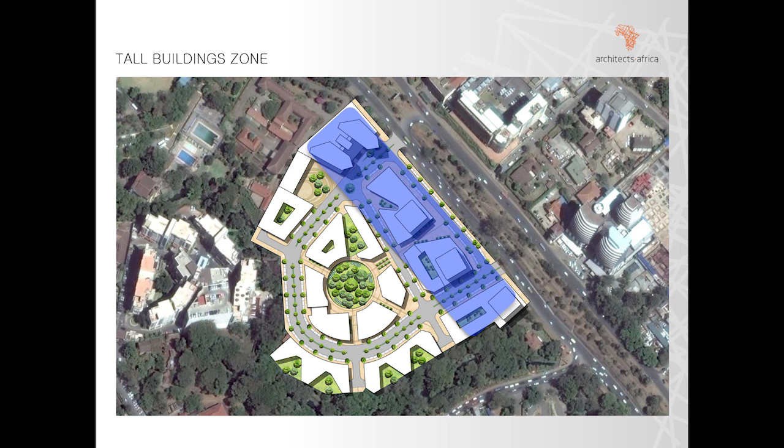So we also looked at creating this pedestrian-friendly public realm, and these are the key public spaces within the precinct. Now, Kenya's got this obsession at the moment with these very tall skyscrapers, which are often built on spec without tenants. At the moment, there's a building under construction that's going to be higher than the Carlton Centre. It'll steal the Africa's tallest building title from us. So that was also part of the brief, is where do we put the tall buildings?

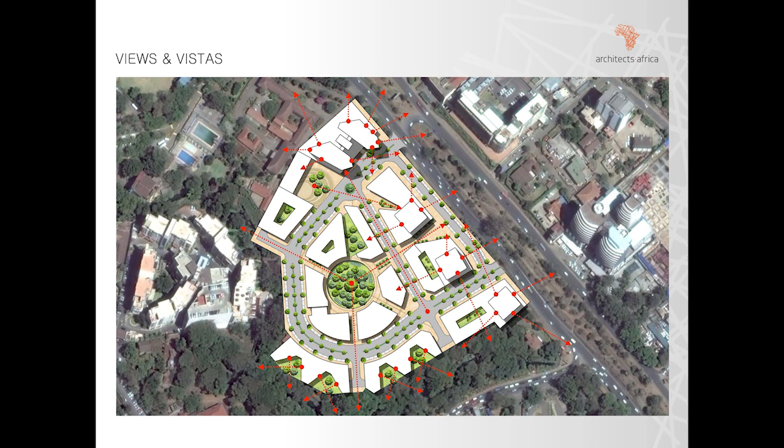So we suggested that they should happen along Chiromo Road on the one side of the precinct, so you don't block light to all the streets and it becomes a very friendly environment for sitting outside. It's not dark and dingy and in shadow all the time. And there starts to become a dialogue between the towers, the streets and the squares, with framed views and terminations of key vistas with the towers talking to the public spaces.

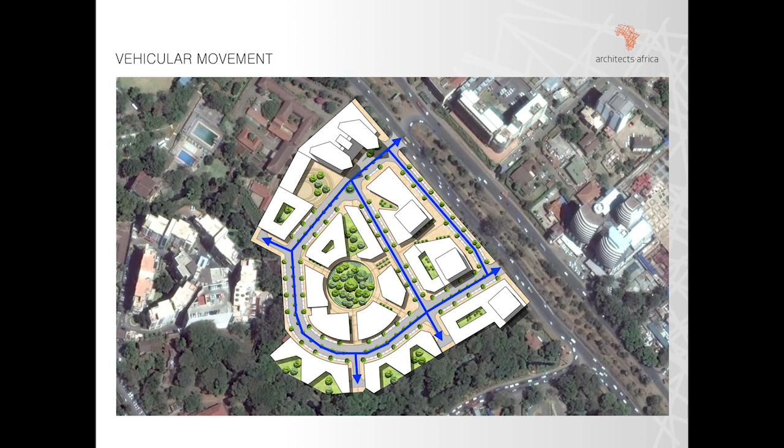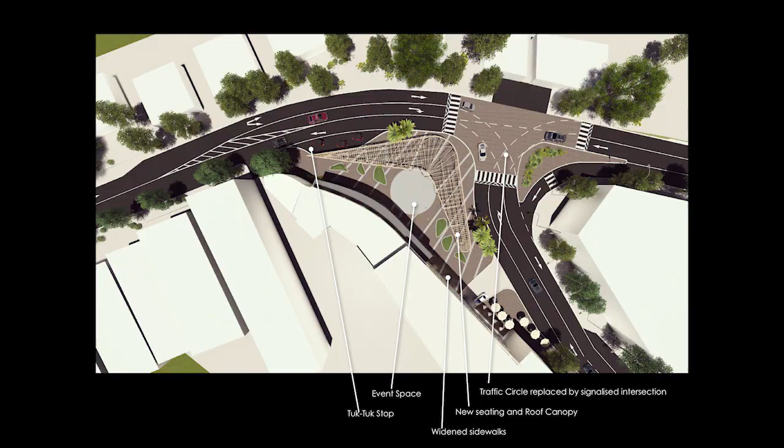They're not stopping, they're not adding anything to the area, they're not stopping to shop or support the local businesses. They're commuting, they're rat running between Western Johannesburg and Rosebank. And how much space is given over to cars versus pedestrians. So we looked at the idea that the traffic circle will be reconfigured as a signalised intersection, and we push it to the corner of that space so that we can create a new public space, so a repositioned intersection.

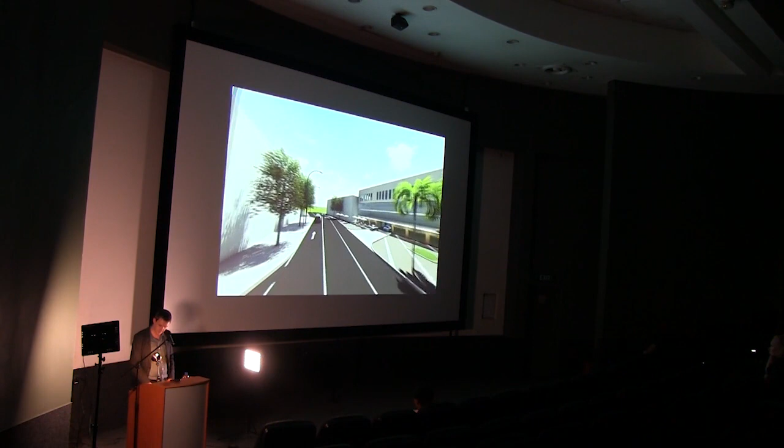Then we introduced this boomerang-shaped pergola structure along the edge of the public space. That's got trader structures at the one end that you can just see coming into view there. So to have solid roof cover on the extremities on either end of the boomerang, covering the trader spaces on the one end. It will then dematerialize in the center so that it's far more just about shade. And then it will be more solid on the other end where there's an intention to have a tuk-tuk stop that's linked to a park and ride service from Pirates Club nearby.

So just some closing thoughts that are some of the points of rationale and thinking behind a lot of this work. We've always attempted to understand the context within which we work. I think a very important part of that is understanding, it's very easy for us as architects and urban designers to get stuck in a kind of middle-class bubble of malls and motorways. The kind of northern suburbs existence, or if you're in Pretoria, the eastern suburbs existence.

You need to understand and remember that for the vast majority of South Africans, this is what life is like. So we need to gain an understanding of what the needs and aspirations of ordinary citizens are. You need to understand the social, political, economic, and historical context within which you work so that you can intervene more effectively. Then I think it's also important that you design for everyone, not just your client.

There's a very nice quote from David Chipperfield: Our clients are not only those who commission us, but also those who occasionally visit, pass each day, or work in the buildings we design. Anticipating and addressing the undescribed demands of others is where true success lies. So I think it's important that you own your own power and privilege and put it to work.

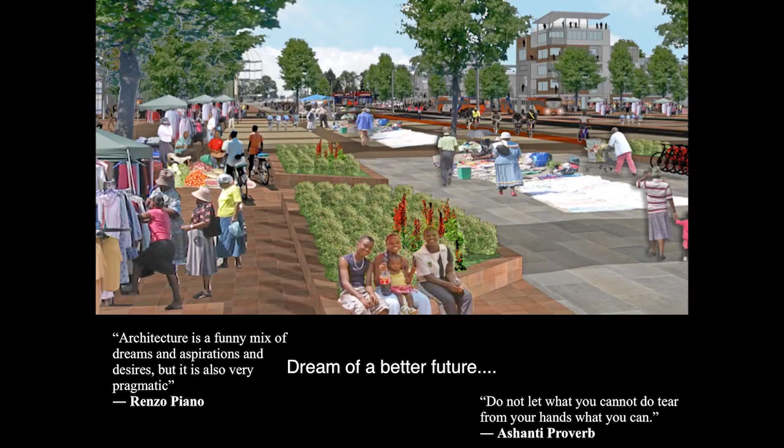And then lastly, it's very important that we dream of a better future. Perhaps when crime is not such an issue, when the fences can come down, when private cars are not our primary means of transport anymore, and perhaps when society is a little less unequal.